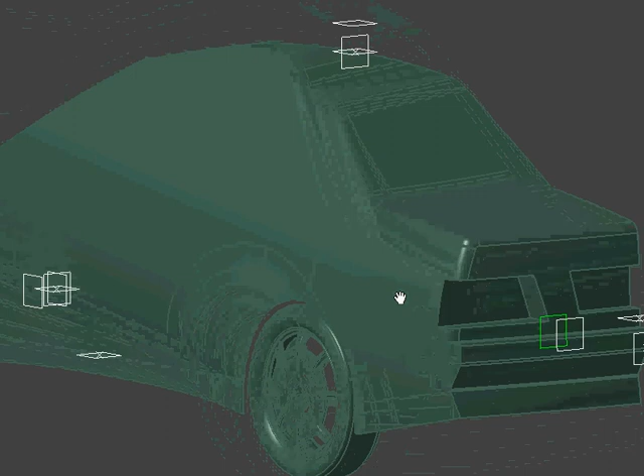Hey again, I just wanted to show you that I have built, this is your car. Thanks for sending it over. It's very helpful to have it to work with in order to show you what I was talking about.

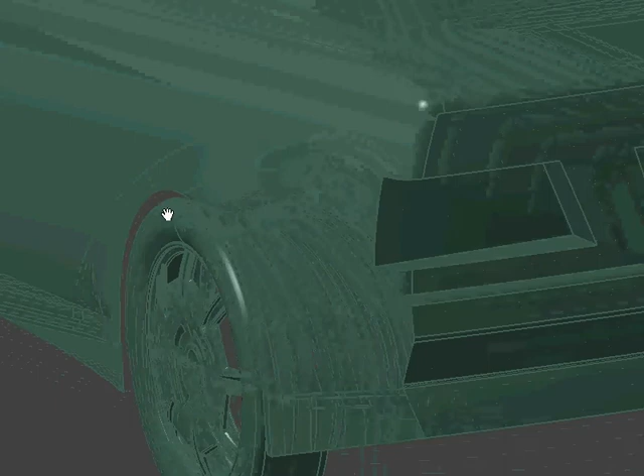First thing I want to show you is that later I'm going to show you how to rebuild this wheel well, because this is a mess. You don't want to have that many patches. Clearly you're using all of those cross sections to control very specific parts of your blend there, but I think you will be happier with the result if you are able to do it with fewer surfaces. So I'm going to demonstrate that later.

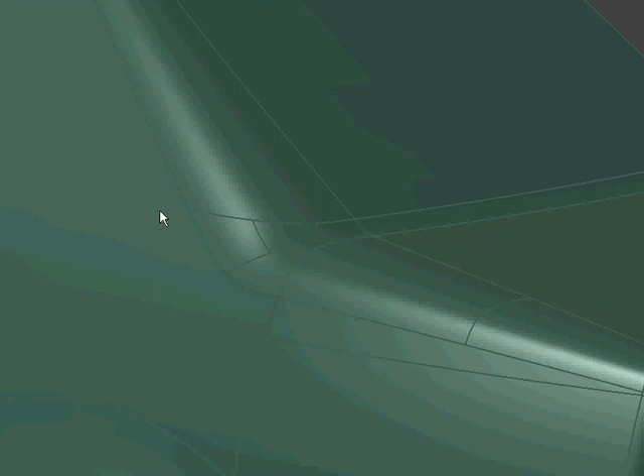But the problem at hand, obviously, is this guy right here. As you can see, you've got a very gradual round coming up here. It's almost just like a couple of variable radius fillets meeting up at one point. And what I wanted to show you is...

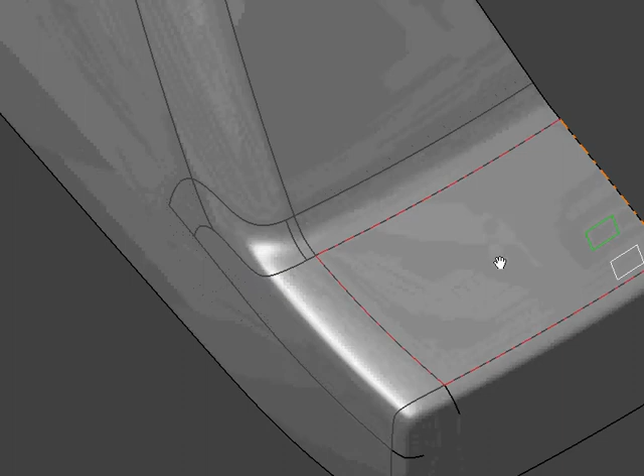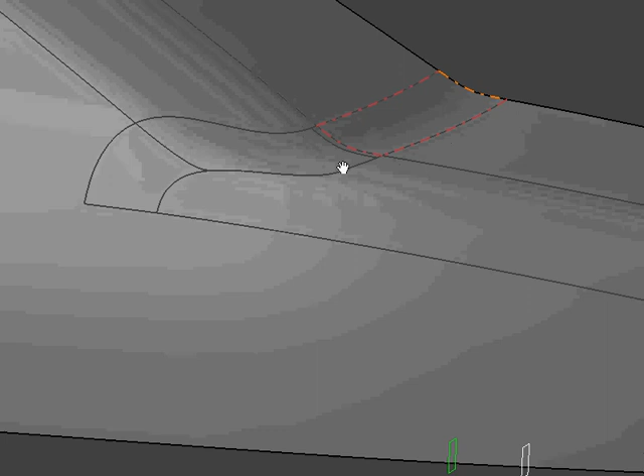I rebuilt your geometry and was able to get much more of that highlight that we were talking about, where, as you can see, the trunk kind of carries up across this round a little bit. And the way that I was able to do that was by creating this conic sweep here, and actually it was a little bit tricky. I had to do some tricks to get there, so I wanted to show you how I got to that point. So let's see if we can do that real quick.

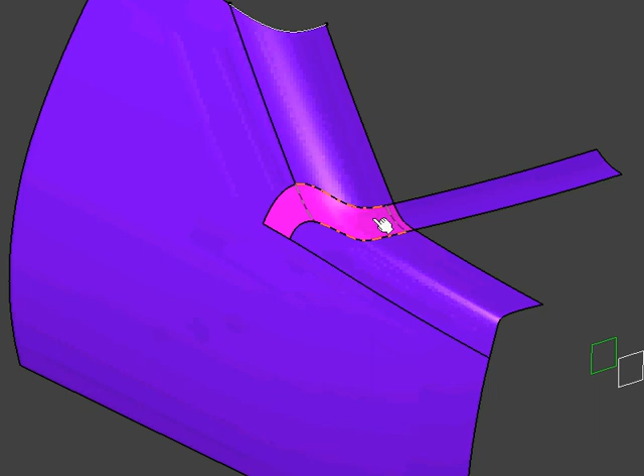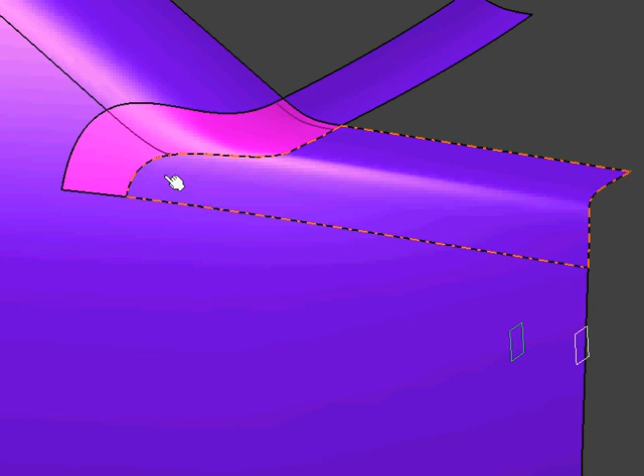So as you can see here, the key to the way I was able to do this was this surface here. What I actually did was I created this blend surface. I'll show you. Alright, I created this conic blend surface to extend out into the body, into the main body, and then used the fact that that was extra long as a tangency surface for this guy.

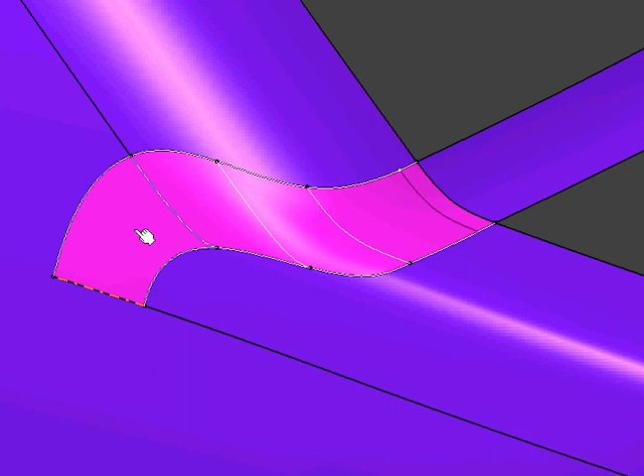And when I built this, I had to use several intermediate curves to be able to control it. So I basically had to make a multi-section sweep along here that was tangent here and here and there, but then running through these guides that then I could easily adjust the tangency. Otherwise it was getting all twisted up in here.

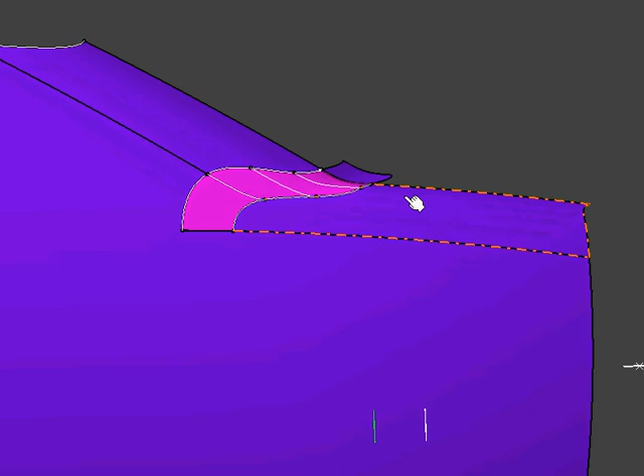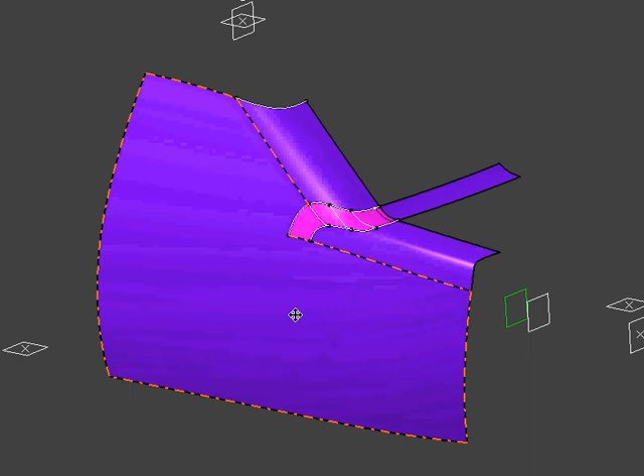That's why it took me so long to figure this out, figuring out a good way to keep this geometry clean. But now it's pretty clean and it works pretty well. So like your photo, in the side view you don't really see much of the highlight catching, but in the top view you definitely see the diving in. So I think that's probably the best way to approach it. It took me a long time to figure out the right way to do this, so sorry to take so long. Hopefully that'll be of help to you.

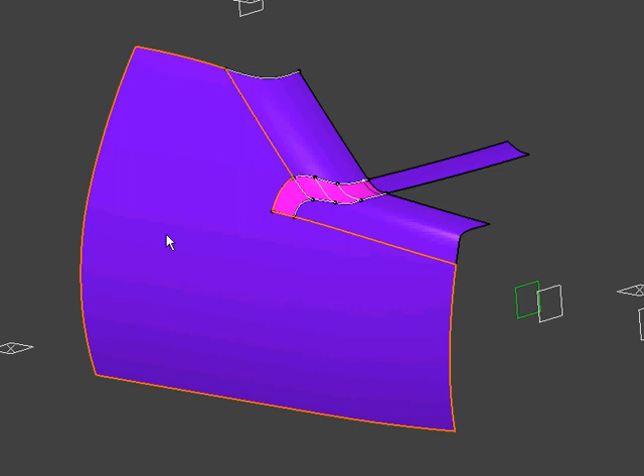There are a lot of things in the way you constructed your geometry, though, that I would love to talk about, and I will. But I'm going to go ahead and build that wheel well first, and then I'm going to show you the way that I built all of this geometry, because I think the way that I've built it would probably be easier for you, because you've got a lot of extra work that you've done, a lot of extra surfaces that didn't need to be built, and also we'll end up with cleaner final geometry.

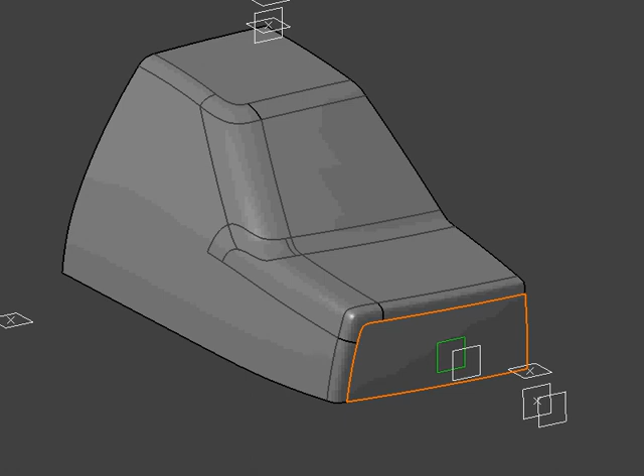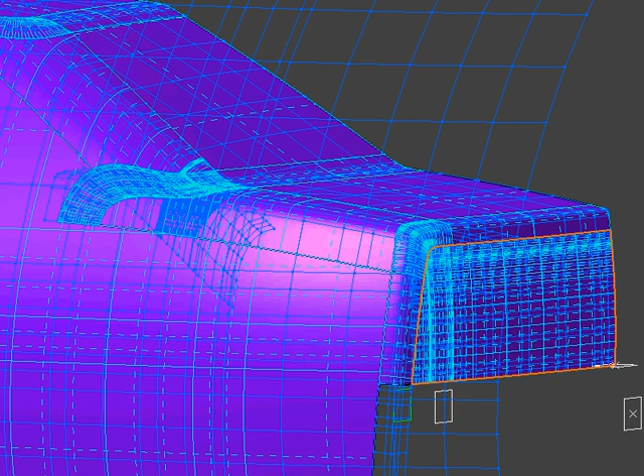Almost everything that you see here, if I dress this up, let's see if we can... oh, hold on one second. Alright. So, whoa, something funny going on there. Oh, I know what it is. Hold on a second. I was looking at the wrong thing.

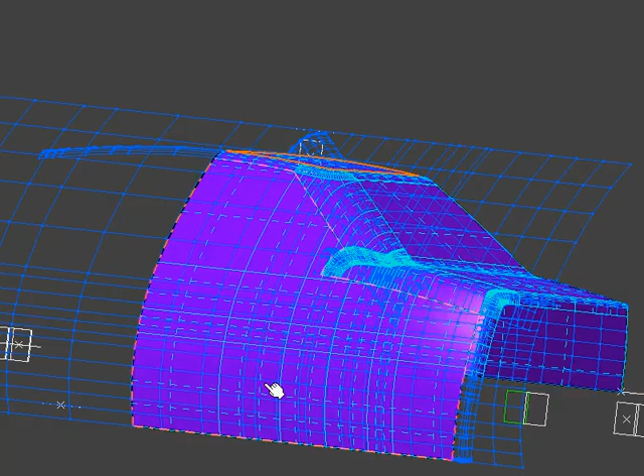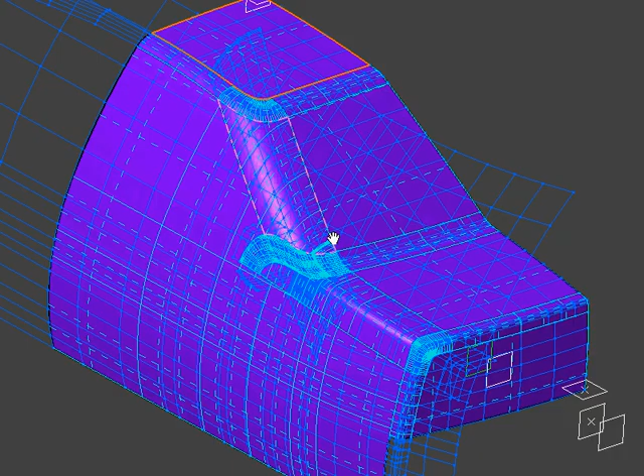Alright, so as you can see, I've got really nice lightweight geometry on these big slabs. Very few control points necessary. And then on these blend surfaces, they're going to get heavier. Tertiary surfaces are always heavier than your primaries and secondaries, but you can see that my primaries and secondaries are very lightweight. If you look at the dashed lines there, those are the main driving isoparms on these surfaces, and as you can see, they're very clean. So I'll go back through that in a future tutorial. Thanks.